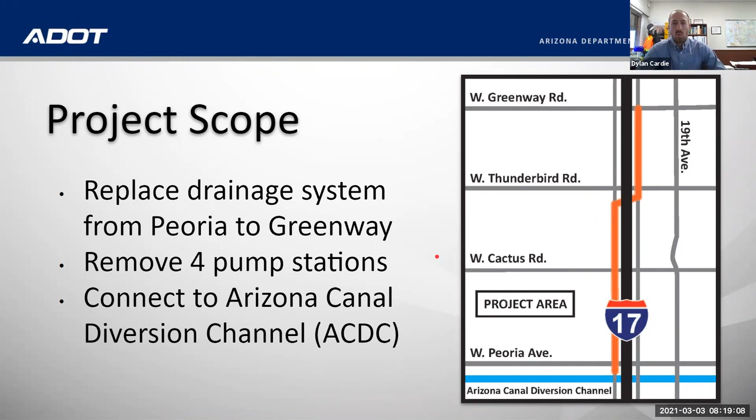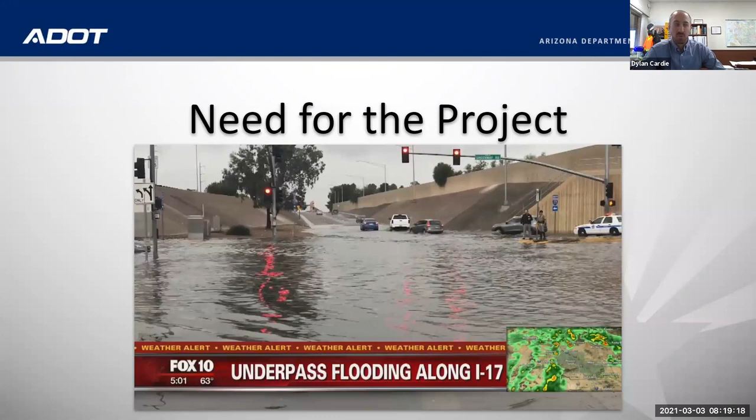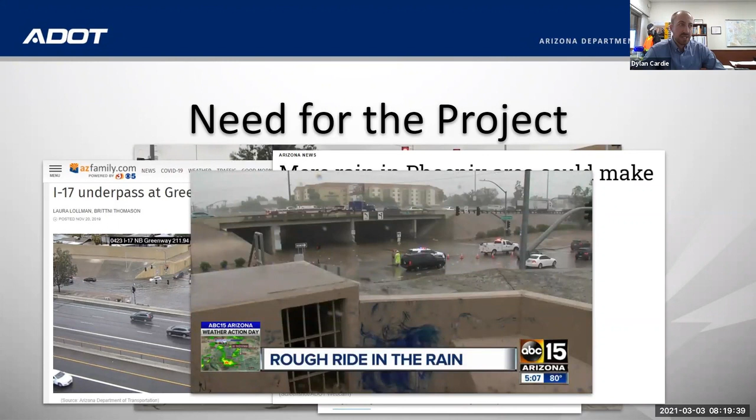So why are we doing this project? Well, if you've been in the valley for any time during any major rain events, you've probably seen on the news, or experienced it yourself, or read an article about how these interchanges perform during a major rain event. In most cases, the interchanges are completely shut down because the existing system cannot handle the water flowing into it. So obviously there's a major need to replace what we have out there, so that we can keep our interchanges open and provide a safe and efficient commute for the traveling public.

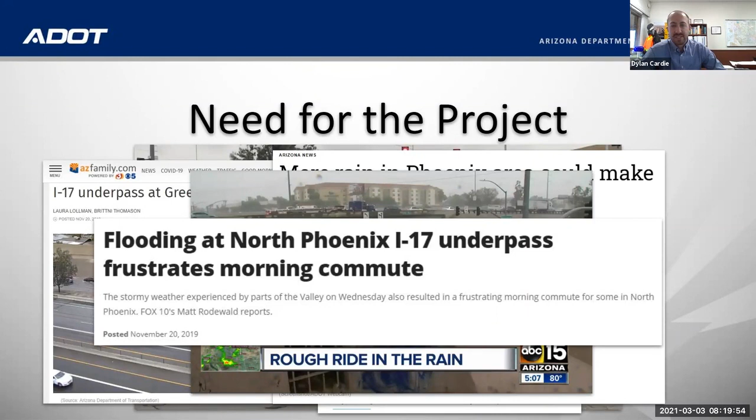In addition, the system we have currently is very, very old. The original pump stations were built in the early 1960s as part of the I-17 project that built the overpasses. Each pump station is comprised of 2 pumps that are powered by 2 engines. Those pump stations, you're talking 60 years old now. The pumps and engines have obviously been replaced, upgraded, retrofitted, and modified throughout the years. But the long and short of it is they've outlived their life, and they're absolutely ready to be replaced.

For those who don't know, let me talk a little bit about how a pump station works. I've actually built or done a few pump station projects. I got some really good experience and learned a lot about how pump stations work, and I think they're extremely interesting.

Essentially, it's a very simple idea. Water is collected at an inlet, either a catch basin or some other drainage inlet, from the roadway, or in our case, at the bottom of these interchanges. It flows through a pipe to a well, and then that pump station up top, where the engines and pumps are housed, pumps water out to a drainage channel, which then flows to its ultimate destination. In our case, the channels flowed through the Phoenix storm drain system, and eventually out at the ACDC. So the final destination is going to be the same, we're just changing the route. It's a very simple idea, but there's a lot of room for problems, and a lot of areas where if one piece of the system fails, we end up with a flooded roadway. So it's very important that everything is maintained and working in good condition.

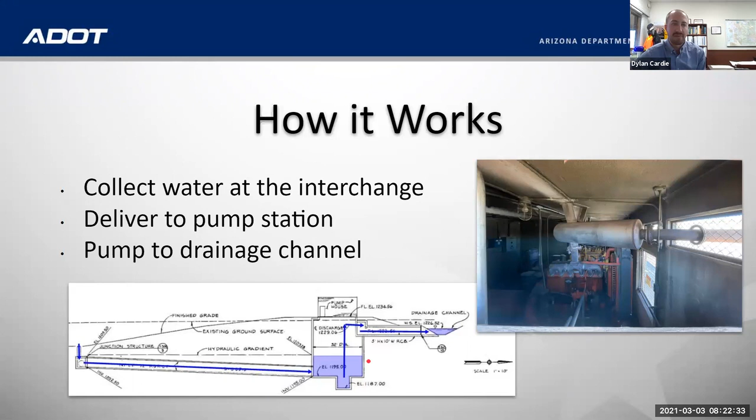I'll get into it in the next slide, but we have a lot to maintain in the valley. If you have a pump engine that fails, a sensor that fails, or a clogged inlet, you're going to end up with a flooded roadway. We try our best to manage it, but you can't predict everything. So there's a lot of room for things to happen, which is why pump stations are not an ideal situation. I think we'd all prefer to have a gravity flow system, but it's not always possible.

So let's talk about pump stations as a whole in the Phoenix area. Last I checked, we had 71 pump stations in the Phoenix area. After this project's over, we'll have 67 pump stations. That includes a total of 253 pumps.

The average pump can pump 22,500 gallons per minute. So the pumping capacity in the Phoenix Valley, if all the pumps are running at the same time, we'd be able to pump 3.3 million gallons per minute. To put that in perspective, that's double the flow of the CAP canal. Or if you connect them all to Bartlett Lake, and Bartlett Lake was at full capacity, that's about 58 billion gallons. We could pump out Bartlett Lake in about 12 days. So a lot of pumping power in the Phoenix Valley.

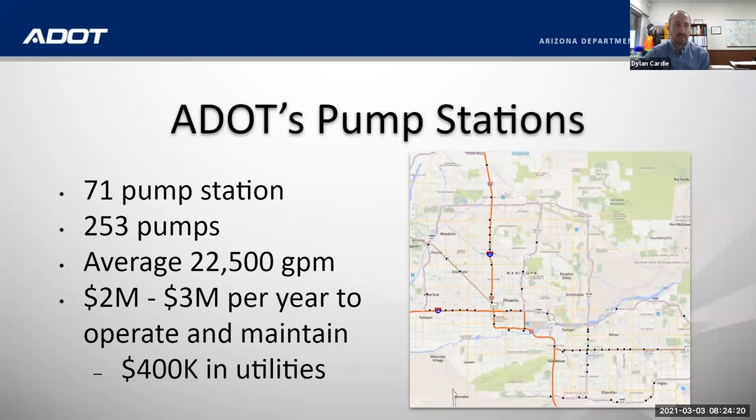Our pump station system is maintained by a crew of 7. So you can imagine on a very rainy day, like we had back in 2014 during Hurricane Norbert, they're extremely busy trying to keep up with the pump station system.

So that's the worst case scenario. That's what we don't want to happen. That's why we spend so much time and effort maintaining our pump systems. And ultimately, that's why the pump stations along I-17 in this corridor are due for replacement, so that way we can mitigate this risk.

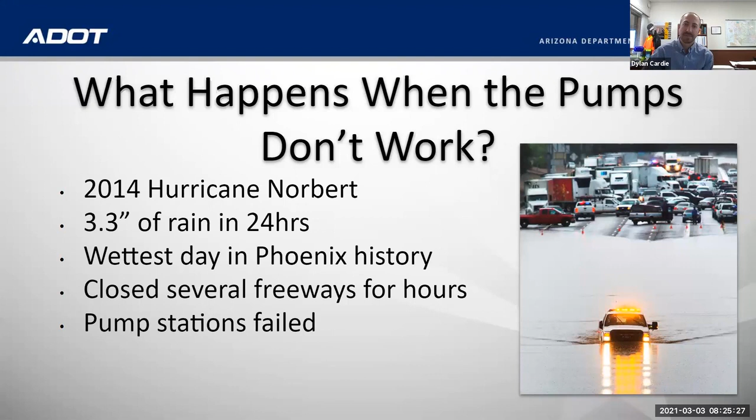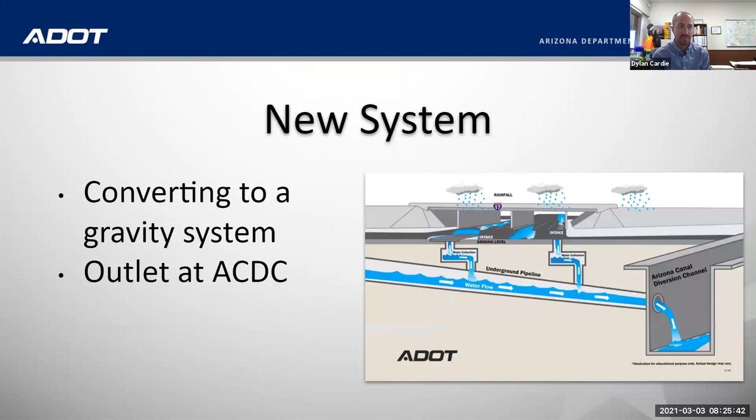So what are we installing? Again, a gravity drain system - we collect the water at the interchanges, bring the water into an underground pipe, and then ultimately flow to an outlet at the ACDC. So that's a very simple drawing of what we're installing.

Let's talk about the project as a whole. This project was programmed for $38 million - $1.2 million of that was for design, $37 million was for construction. The project was designed by Gannett Fleming, and construction was awarded to Fisher Sand and Gravel with a bid of $29.6 million. The contract time is 680 calendar days. We started this project back in November 2019, so we're right in the middle of it now.

Let's talk about some details about the project - I did steal some of this information from a presentation that Gannett Fleming did about the project, so thanks for that.

23,800 feet of pipe is what we're installing. 600 linear feet of that is 30-inch jack and bore, and that's in the section just south of Thunderbird Road where we're crossing underneath I-17. We haven't gotten there yet, but that's going to be a challenge for us.

We're installing 54 catch basins, 48 manholes, removing 4 pump stations, constructing 3 new junction structures, and 2 new detention basins, totaling 171,000 cubic yards of earthwork. Those detention basins are at Thunderbird Road, on the north and south side on the east side of the interchange, which I'm sure you've seen if you've driven by that area - can't miss them.

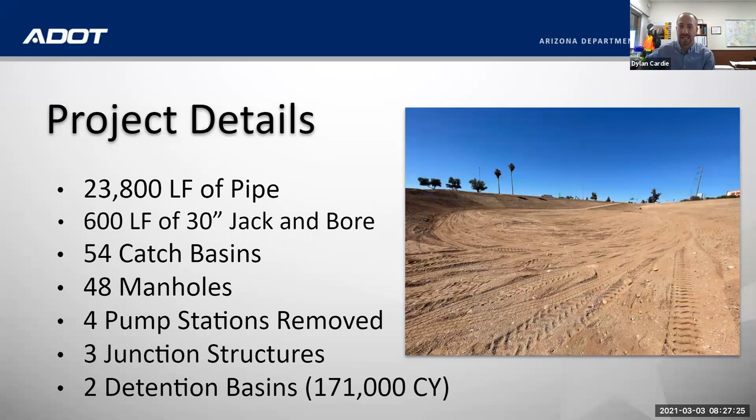So let's talk about some project challenges we identified very early in the project. We knew this project was going to be difficult just because of the amount and size of reinforced concrete pipe, the RCP, that we're installing. For perspective, the largest pipe is 90 inches underground. We have a little over a mile of 72-inch pipe, 3,500 linear feet of 84-inch pipe, 2,700 feet of 54-inch pipe, and all the sizes in between. It's a lot of very large pipe that we're installing.

The other challenge we identified was the junction structure at the ACDC, where we terminate, where the project ends. That's what you see in this picture, the shoring that was set up about a year ago. We're done with this part of the project now, but where this lands is right between the existing southbound frontage road along I-17 and right up against Castles and Coasters. There's a lot of concern with making sure their property is maintained, their walls are held up, and our frontage road is managed as well. So pretty extensive shoring efforts to ensure everything was held up at the ACDC.

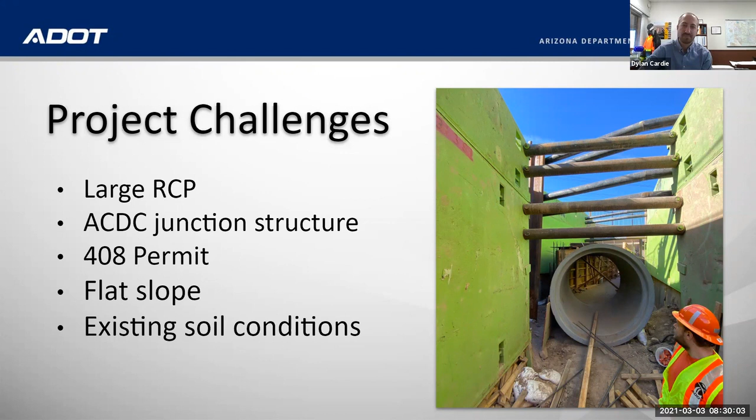Some other project challenges we knew going in were the tight project limits. There's not a lot of room to build this project, and on top of it, we're installing pipe up to 30 feet deep. Imagine installing 84-inch pipe 30 feet deep within the footprint of a single-lane frontage road, between a noise wall and a utility or APS transmission line. That's exactly what we're doing on this project. We knew it was going to be a very tight corridor to work in, with very deep excavations, not a lot of room to store equipment, not a lot of room to walk around and inspect, just enough to build the project. What you see here is a representation of that and some of the challenges we've had.

This project is all underground, so we know utilities was going to be a major concern, whether existing utilities we know about or unknown utilities. The plan and coordination that went into utility coordination was extensive, and for the most part, our utility coordination has been excellent on this project.

I-17 traffic was something we identified early as going to be a challenge for MOT on this project. We're closing down frontage roads, intersections, and on and off ramps. But the reality is we've actually done a very good job of managing the traffic, and we haven't had many issues or backups associated with the project. Overall the MOT has gone extremely well. It was something we were really concerned about, but coordinating with our partners in the City of Phoenix and others, we haven't had any major traffic issues.

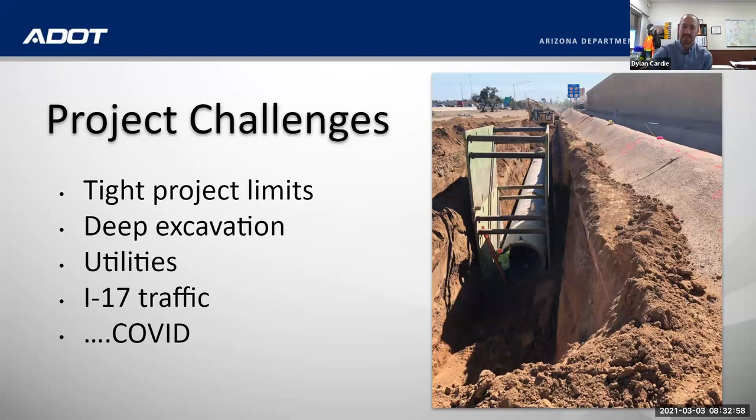Talking about utilities, the ones we identified early on as a major concern were a couple of City of Phoenix utilities. First, the 33-inch sewer line that crosses at Sweetwater. We haven't reached it yet, but we're heading towards that direction, and we're going to be going underneath it. There's going to be extensive coordination with the City of Phoenix when we get to that point to ensure we're not impacting their sewer line at all.

The amount of effort put into coordinating with the city regarding the sewer line, and then their 48-inch water line at Greenway, has been excellent. The project team—the contractor, the designer, ADOT, and the city—has all done an amazing job trying to stay ahead of construction, plan, and predict what we're going to do and how we're going to do it, going into these crossings with the best plan possible.

The 48-inch water line at Greenway Road is the very last piece of the project we'll be completing. That water line was planned to be removed or relocated prior to us getting to Greenway Road, but as we approached and got into construction, the City of Phoenix had the idea that maybe we could avoid relocating it, because the pipe we're installing is very close to the top of the water line. So the City of Phoenix, ADOT, and our contractor all went out there, potholed, and did additional investigation, and discovered the top of the pipe is low enough that we should be able to miss it as we install our storm drain.

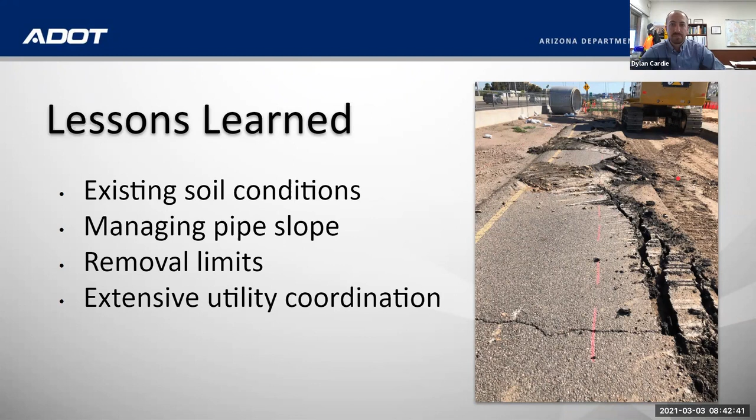So that's a lesson learned where I think we've done everything right. We'll see how it turns out, but I think we've done an excellent job of staying ahead of that. We have a really good plan, and I'm hoping we're successful. So, but that's pretty much all I had. I hope to come back again and give you a full lessons learned for the entire project once we're all complete, because I'm sure there's going to be a lot more that we're going to learn. But I guess if there are any questions, I'd be more than happy to answer them.